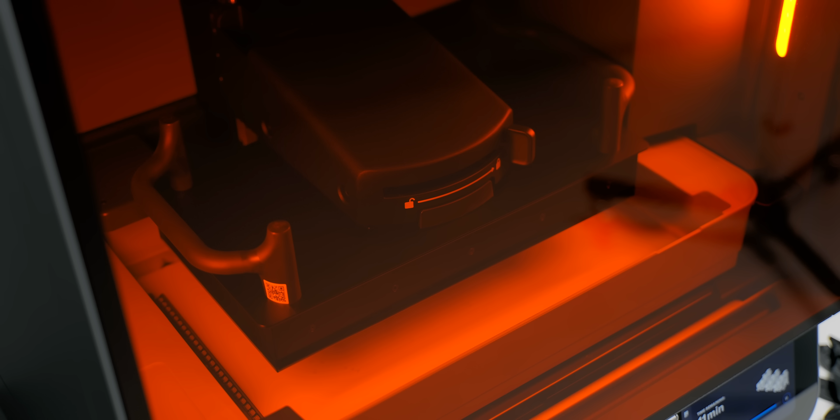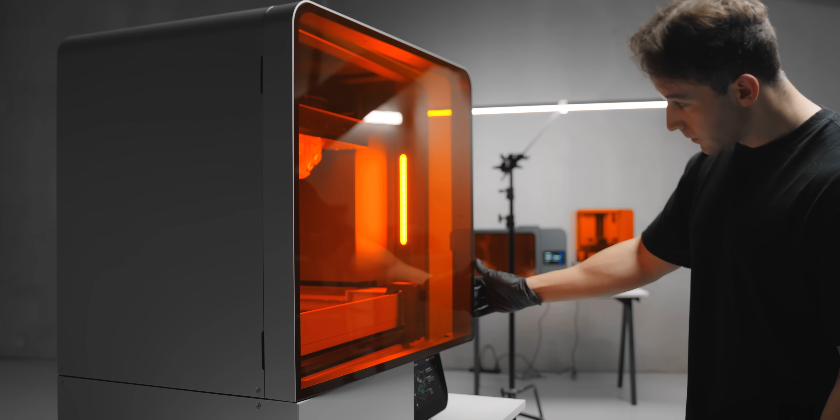You've probably seen filament 3D printing at this point. When someone mentions 3D printing, this is usually what they're talking about. You've got plastic filament like this, which is pushed through a really hot nozzle, and that's rapidly drawing your 3D model layer by layer.

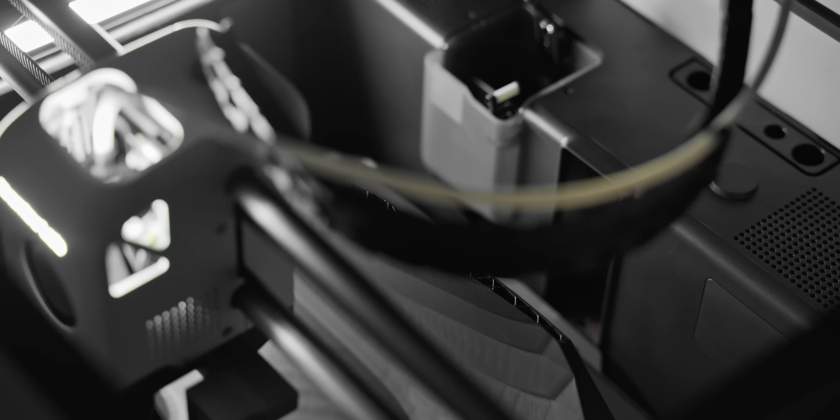These machines have become extremely affordable, and the filament as well is really, really cheap. The two I have here are Bambu Lab X1 Carbons, which I've been using for the past couple of years, and it's pretty much as good as filament 3D printing currently gets.

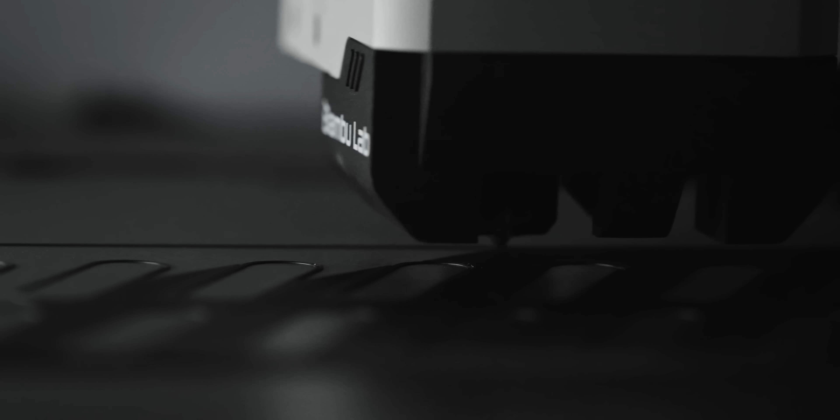They do have their limitations though. You can't really print really small, really detailed objects on filament 3D printers. You can only print as small as the nozzle that you're printing with. On most printers, that's 0.4 millimeters. These printers can go down to 0.2 millimeters just by swapping the nozzle out, but even that is not detailed enough for some objects.

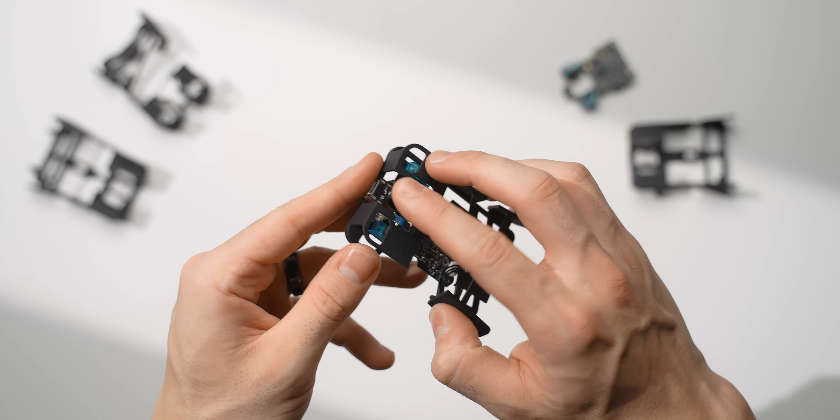Now that sounds really, really small, basically just a fraction of a millimeter, but if you want to print something like a scroll wheel for a mouse, for example, you need to go way, way lower.

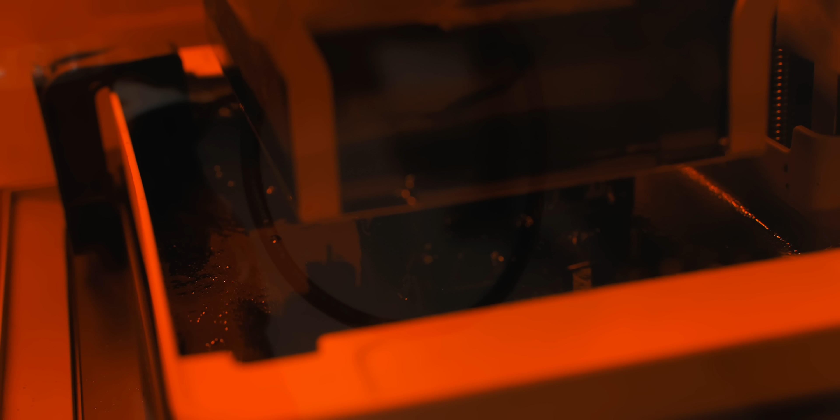And for that, there's resin 3D printers like this one, which take detail and resolution to a completely different level. This would be like if a filament printer had a 0.05 millimeter nozzle. That's the kind of detail that we're talking about.

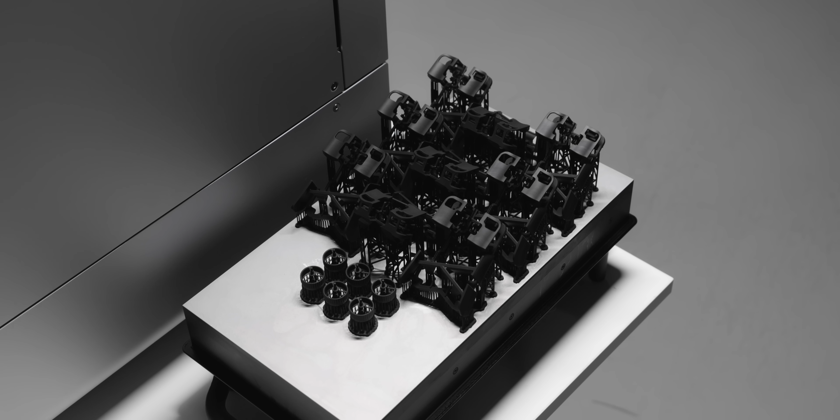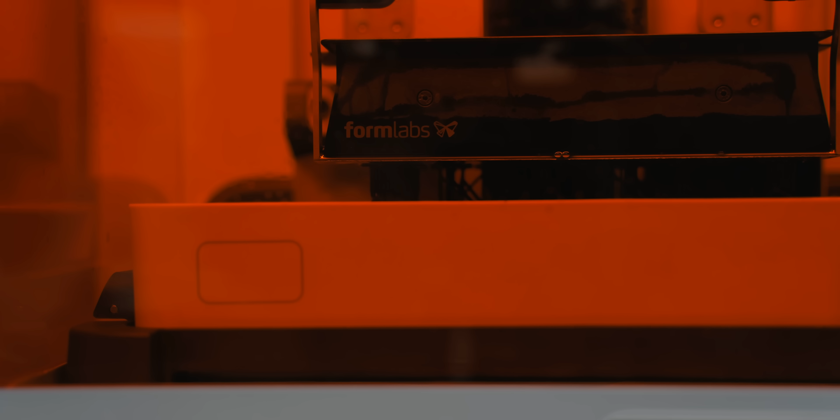Also, if you've never seen resin 3D printing in action, the first time I saw it, it completely blew my mind. In here is literally liquid resin, which is reacting with UV light to create the highest detailed 3D prints that are possible today.

I'm gonna go ahead and close this because you really shouldn't be breathing this stuff in, but yeah, resin 3D printing, especially on these machines here, it is pretty insane.

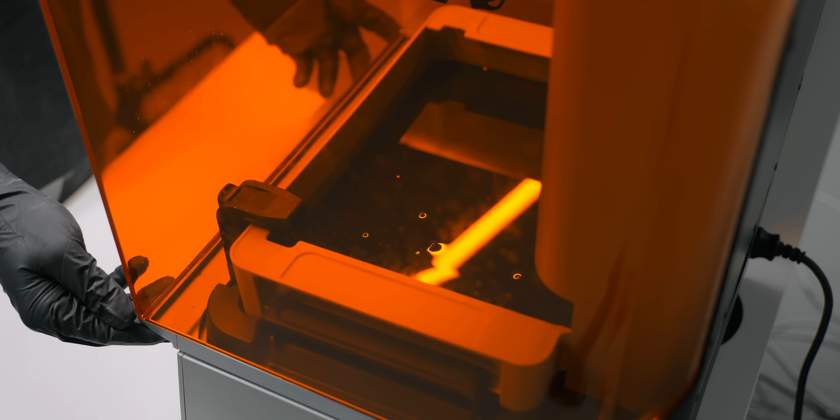If you've ever wondered what 3D printers companies like NASA or Microsoft use, it's actually these. This is a Formlabs Form 4. I picked this up about a month ago, mainly to prototype the Zero Mouse and just to kind of iterate on it at a higher speed.

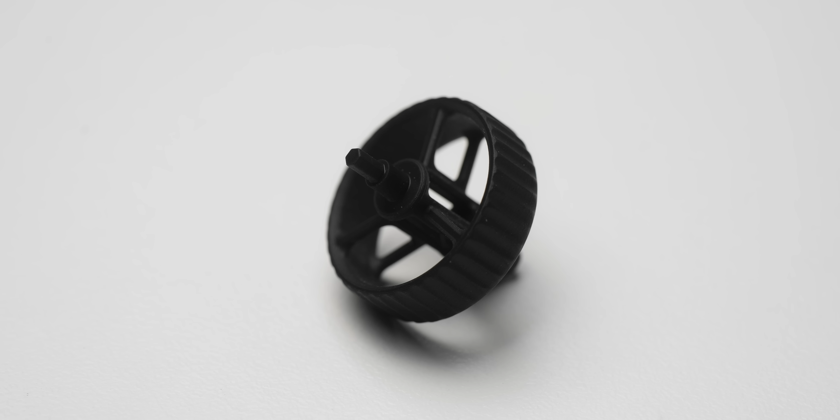But then I saw the quality of the prints that I was getting off this machine. I'm not kidding, they are production quality parts. But believe it or not, at that detail, they also print very fast.

While filament printers need to trace and fill in each individual layer, resin printers print the entire layer at once. They have a screen at the bottom which exposes the resin tank with UV light. Each layer is exposed uniformly one by one, and that ultraviolet light reacts with the resin to create the hardened resin plastic.

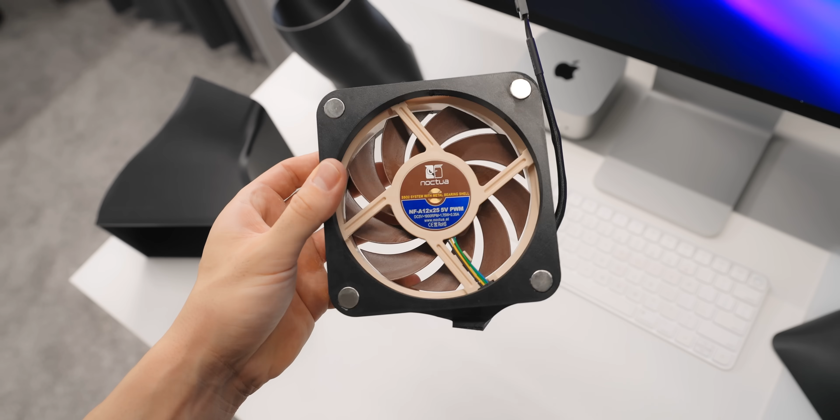This is where things get really crazy. A filament printer needs to draw each individual layer, so the printing time scales linearly with the amount of objects that you're printing. Printing an object 3 times will take 3 times as long compared to just printing it once.

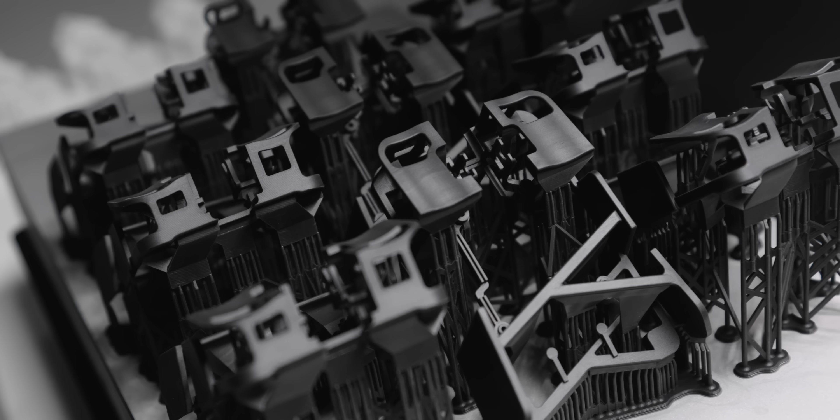Resin printers, though, take almost the same amount of time to print 1, 2, or however many objects you can fit on the build plate. And the build plate on my new 3D printer is absolutely massive. This is about as big as resin 3D printing gets before you start getting into like the enterprise $100,000 machines.

So yeah, after I saw how good the Form 4 was, I reached out to Formlabs and said, hey, I'm gonna start doing some production stuff on these machines soon. Do you maybe wanna send me the bigger version, the 4L? And yeah, here it is.

This is my new 3D printing workhorse, the Formlabs Form 4L. Absolute beast of a machine. I mean, I can almost climb inside here. The print volume is that big.

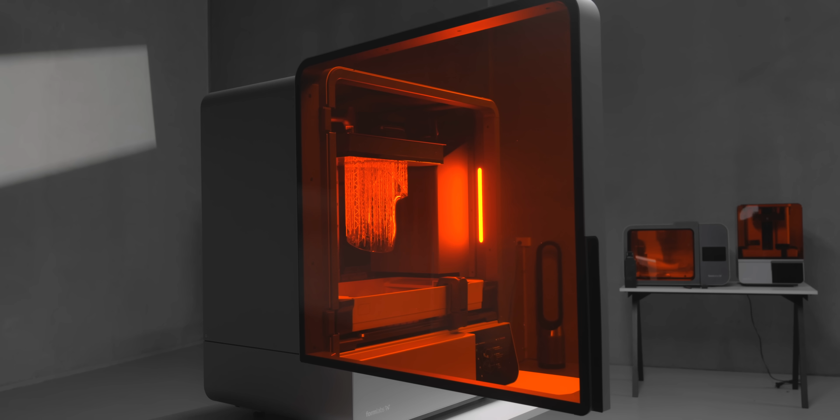But yeah, I think the best way to show you how insane this thing is, is to quickly get it set up and we'll do our first print.

Setting up the printer only takes about 2 minutes. You just insert the resin tank, insert the mixer, clip on the build platform, connect to the Wi-Fi, and insert whatever resin you want to print with.

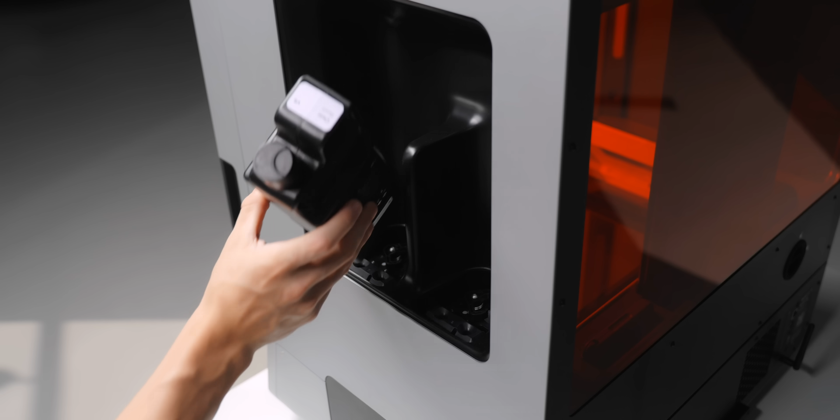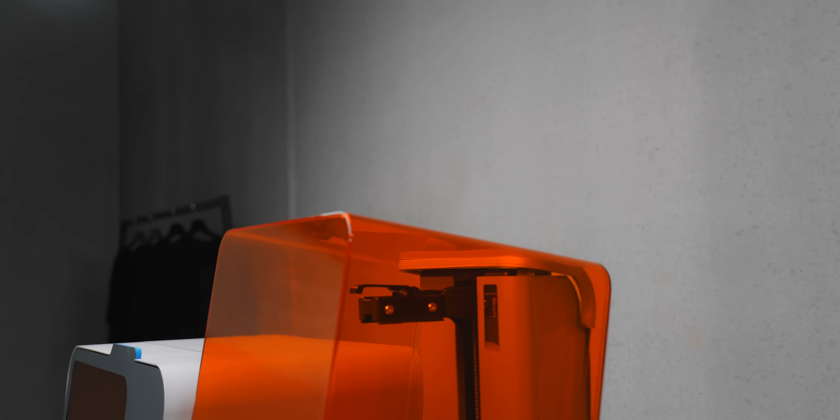The build platform comes leveled out of the box, and something you don't realize until you have these machines in hand is how well made they actually are. From product photos online, you can tell they're very premium machines, but every interaction you have with these printers is like a quick release latch or a soft closing hinge. Everything is so easy and refined.

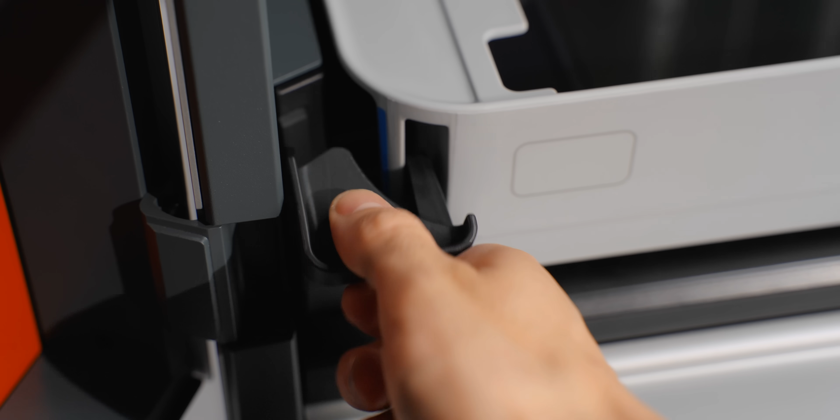When your tools are this nice to use, it not only removes the friction of making stuff, but for me at least, it makes it thoroughly enjoyable every time you fire them up.

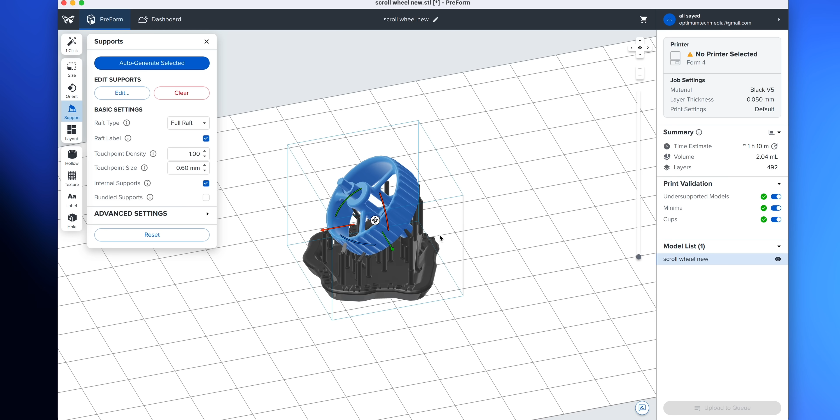Formlabs have their own slicer printing software called PreForm, and my experience with it so far has been actually pretty good. You just drag and drop in your 3D model, click Auto Orient, auto generate the supports, and after that you're ready to print. You can go in and edit the supports, clean it up a little more if you're producing a final production part, but for the most part the print automation is actually really good for most people.

This is what I really wanted to show you though: how fast the print speed is on that 4L. If I just wanted to print one scroll wheel, it takes about the same amount of time as my Bambu Lab X1 Carbon, so a little over an hour, which is actually pretty good considering the quality of the part is in a completely different league. I mean, this is almost injection molding.

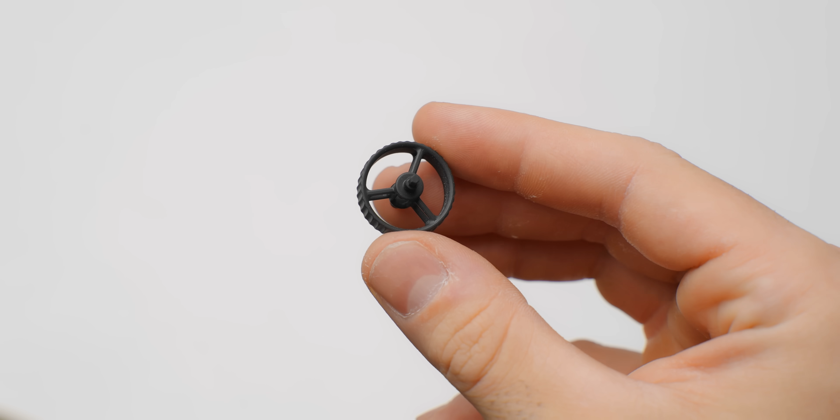If I wanted to print 100 of these though, we're looking at some very different print speeds. Over 3 days now on an X1 Carbon, and only 2.5 hours on a 4L. I could print over 1,000 of these in just a couple days on one machine.

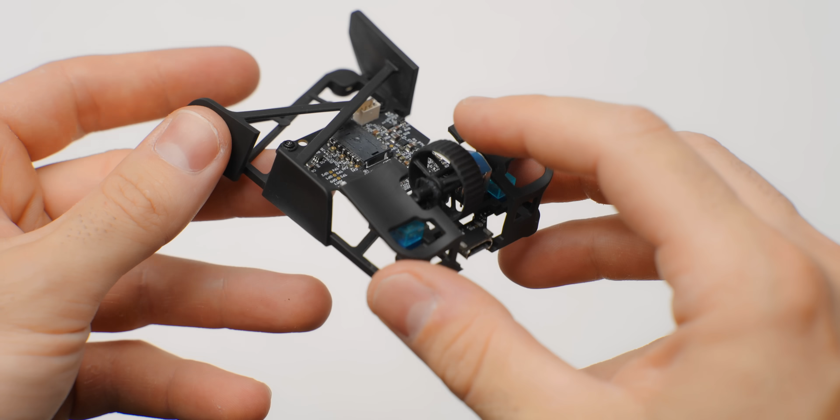So this is the resin that you use with the printer. It's pretty cool, it just drops in like a cartridge. The 4L has 2 loading slots because the tank and build volume is so huge. But these are pretty cool, they have bite valves on the end, so it automatically dispenses resin into the tank just as you need it. There's no pouring the resin in and getting all messy, which I absolutely love.

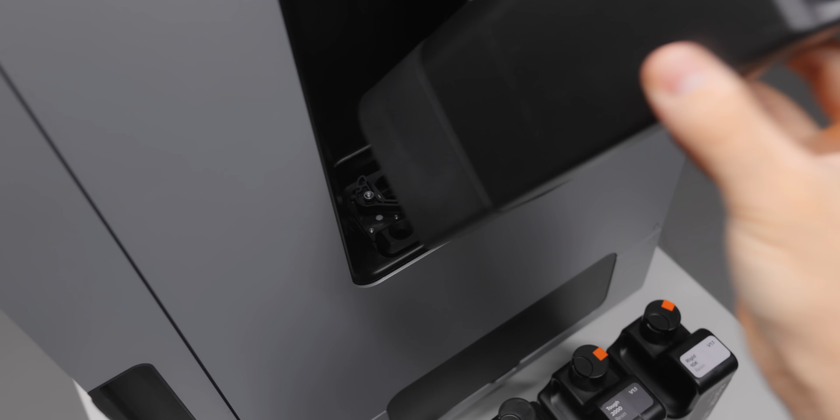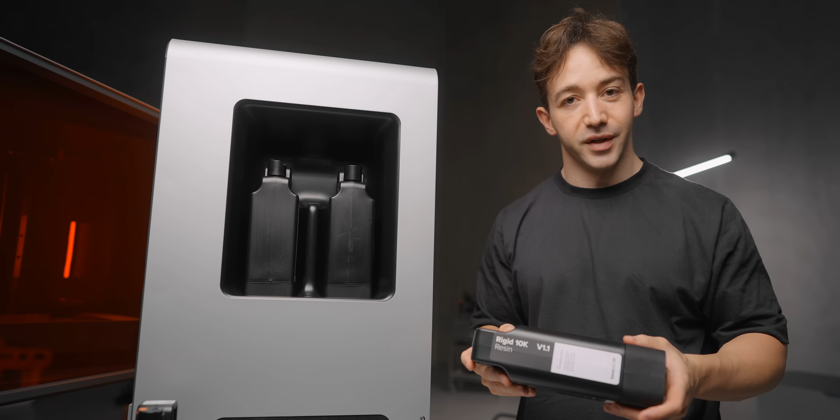I do also have to say Formlabs' choice of resins and materials is very, very insane. If you are doing proper, serious 3D printing, prototyping, or even production like myself, Formlabs do not play around. It's one of the reasons I bought the Form 4 over cheaper alternatives. Their material catalog is nuts. You've got glass-infused resins, ABS-like resins, elastics, silicones, biomed resins for dental stuff, or even for implants. It's pretty crazy what some of the stuff you can 3D print.

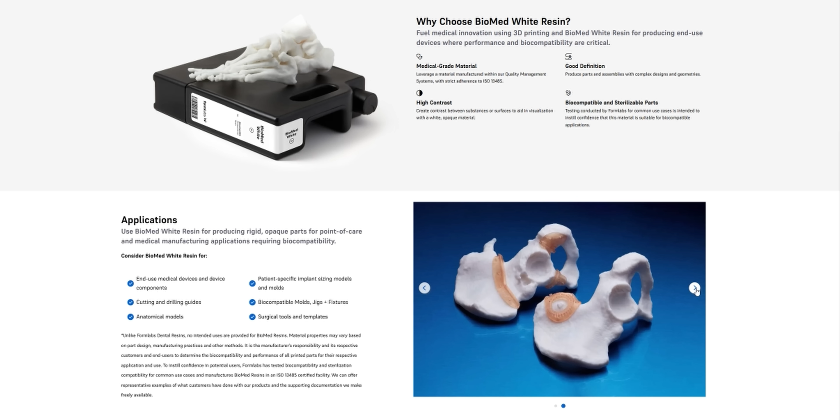There are definitely much cheaper resin 3D printers and resins on the market as well, but honestly, I'm at the point now where I care way more about the final result, the quality of the print, the quality of the machines as well, and the workflow efficiency, than I do saving some money on the machines and the resins.

And believe it or not, I did crunch some numbers for printing my own Zero Mouse. It is actually cheaper to print it on these Formlabs resin machines than to outsource them like I was doing before.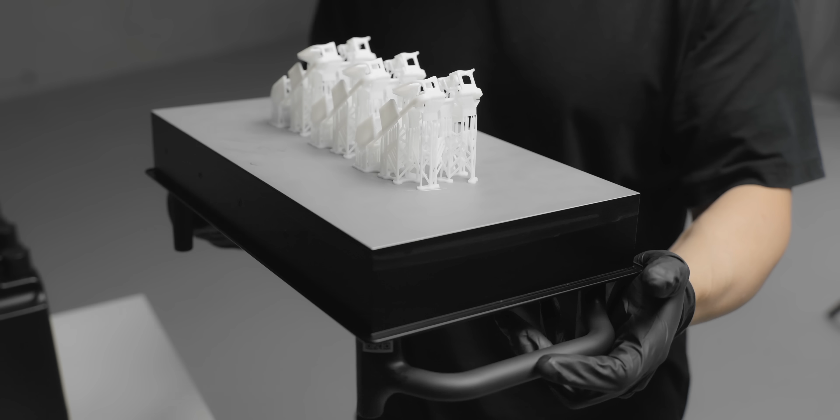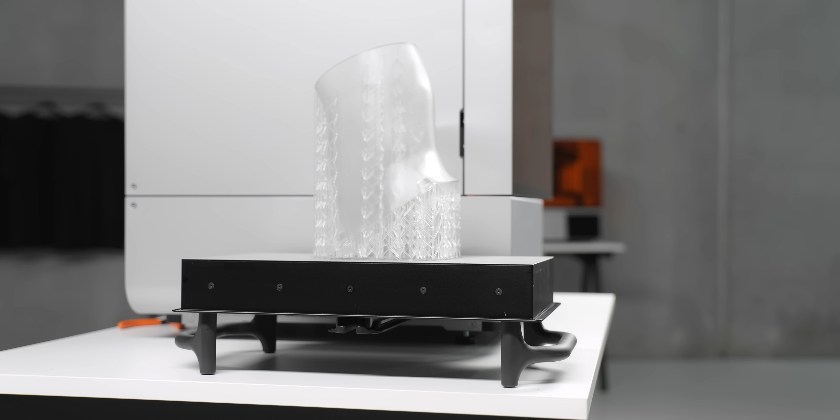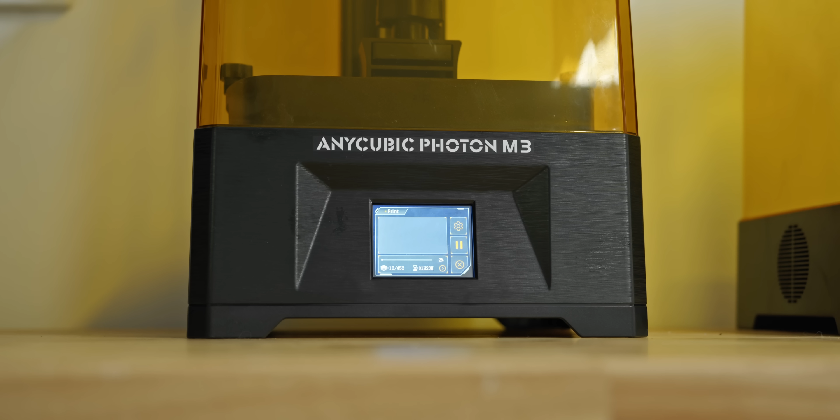There is one big downside to printing with resin though, which I haven't mentioned yet. Once your print is finished, you actually need to wash it with a solvent and then post-cure it with UV light. This is one of the main reasons why I've stayed away from resin 3D printing for so long, and why I actually had a cheap resin 3D printer a while ago, which I just haven't bothered using ever again. Resin printing is just messy and there's a lot of steps.

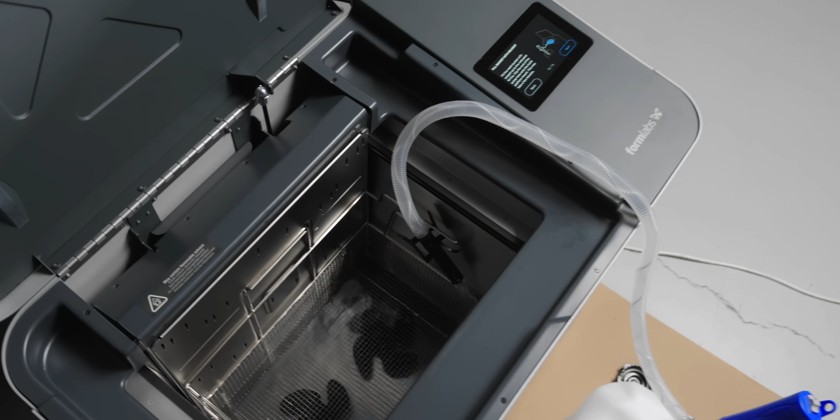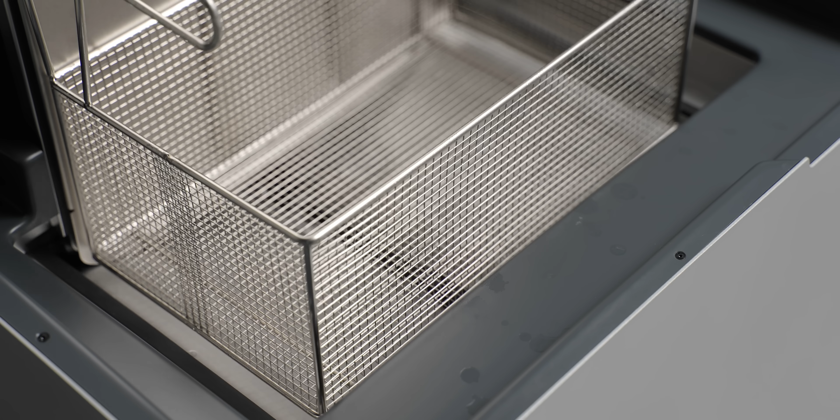Formlabs though is different. It's a premium price for a premium experience. The giant wash machine for the 4L, which takes almost 50 liters of IPA, looks intimidating, but could not be easier to use. There's no getting your hands dirty or cleanup involved whatsoever. You just place the build plate on the rails, press a button, and come back 15 minutes later. Occasionally, you need to swap out the solvent, but you can do that with the pump they provide.

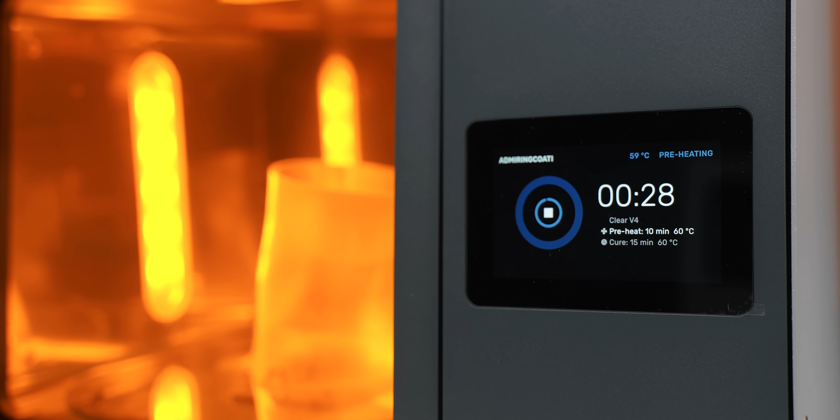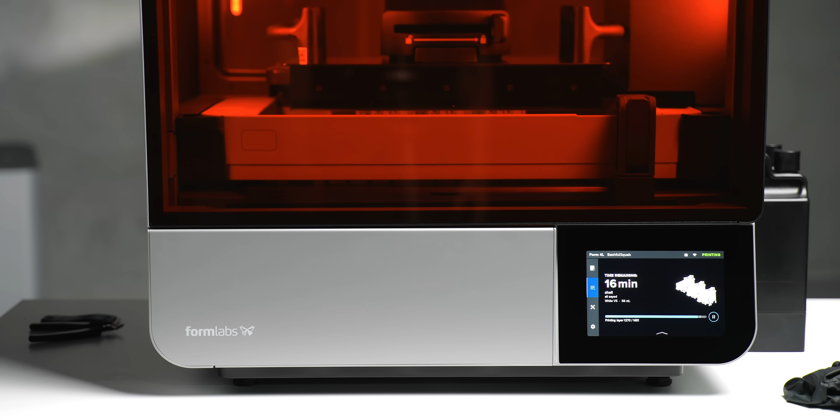And then there's the cure station, basically a giant microwave for UV light. This is to further cure the print, improve the mechanical properties and the surface quality. Here, all the profiles are built in, so temperatures and duration are impossible to mess up. I've yet to find any annoying things or pain points in this workflow. Every step of the user experience with these printers has been obsessed over down to the details.

By far the best thing that I've ever 3D printed though is the Zero Mouse. I wanted a mouse upgrade for my ranked esports games, and what I wanted didn't really exist.

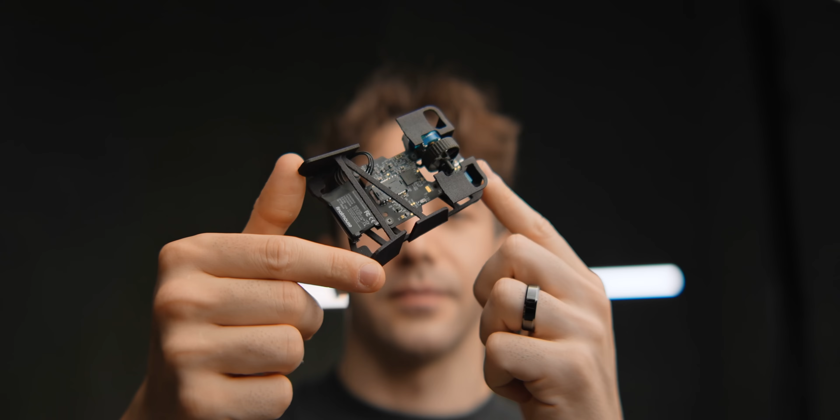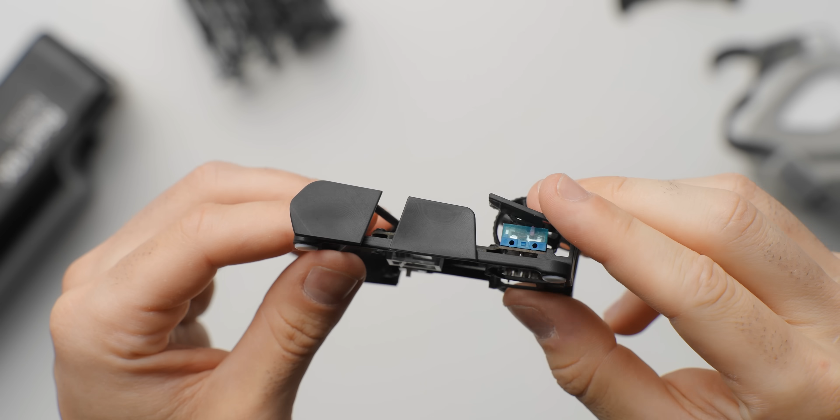So I decided to make something myself, and a bunch of iterations later, we've got the Zero Mouse Blade, and it's now 3D printed using Formlabs black resin, and I think it looks pretty incredible. I've been using this for a little bit now, and it is a massive upgrade from what I was using before. Previously, these shells were printed in nylon 12, which is a really nice material.

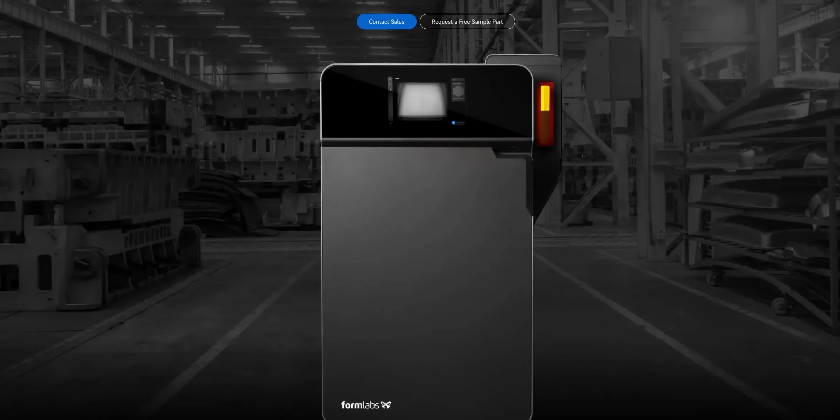It's low density, relatively strong, and really easy to print. Formlabs actually have another machine called the Fuse 1 Plus, which can print nylon 12. I was pretty interested in that as well, but the more I print and go down this path, the more I realize that resin is actually the best choice for what I'm doing, especially this resin here.

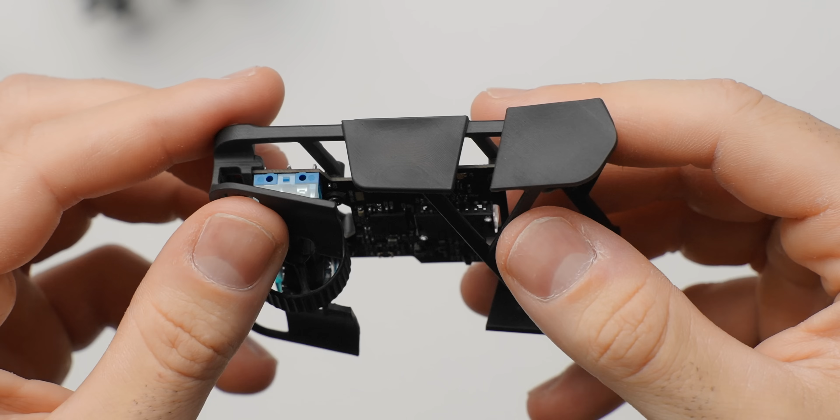This is Formlabs black resin. It is really close to the quality of injection molding. You can still see layer lines in some spots. There is a little bit more optimization I can do in terms of where I'm printing the supports to reduce those layer lines, and how I orientate the model. A couple of degrees here or there can really shift where the layer lines pop up.

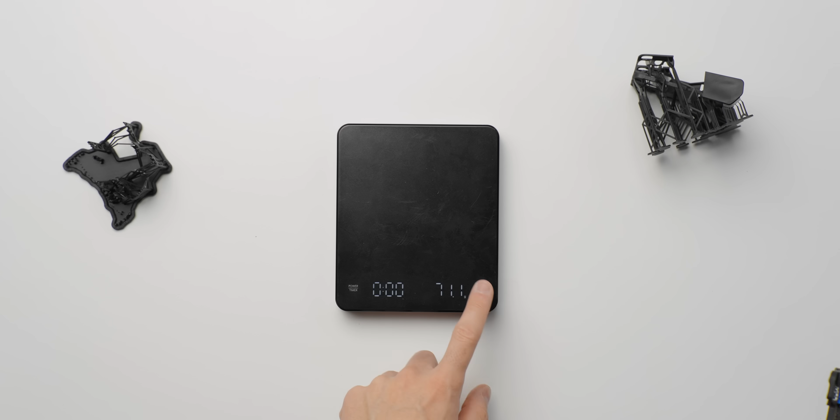So there's a little bit of optimization to do there, but yeah, this is printed at 50 microns. I can go down to 25 micron layer height, and that will resolve the layer lines even more.

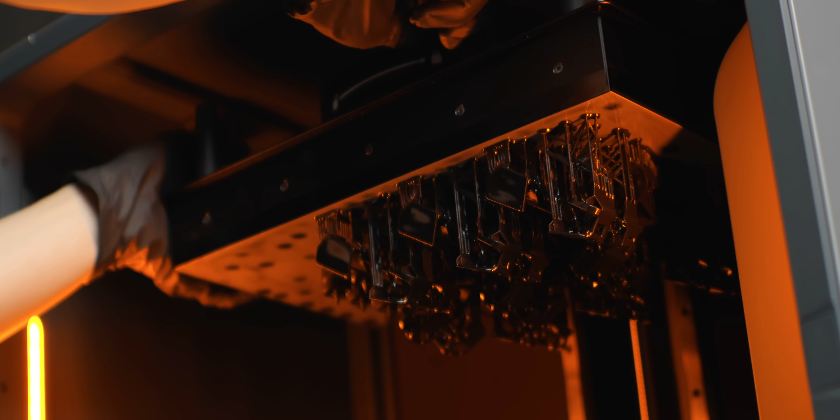In terms of how many I can print in one go, here I've got 9 shells plus 6 scroll wheels. I can actually fit up to 15 shells in one print on the 4L, which is pretty crazy. That's like a 3.5-hour print, which is pretty quick. Over one day, say 3 to 4 print cycles, that's like 45 to 60 shells.

I'm most likely going to be adding another machine to the workflow as well, so that's going to bump the print output to around 100 shells per day, and around 1,000 in 1 to 2 weeks. That's actually faster than it took for my outsourced nylon prints, which is pretty insane.

But yeah, there it is. Zero Mouse in Formlabs resin. Looks amazing, feels amazing, and I could not be happier. I'm just waiting for the circuit boards now, and these will be ready to ship.

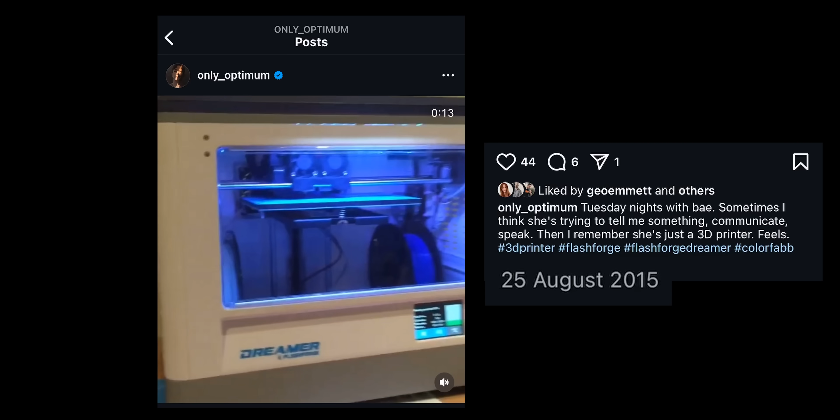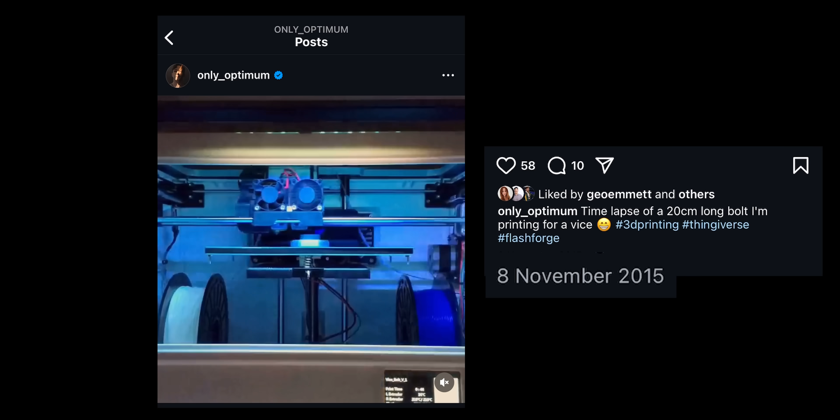Now, I started 3D printing almost 10 years ago. My first printer was a FlashForge Dreamer, which I spent all of my money on. I was obsessed with it. I had to manually level the bed for every print. I had my window open constantly because of the ABS fumes. The thermocouples had to be replaced on both of the extruders, and I had no idea how to 3D model.

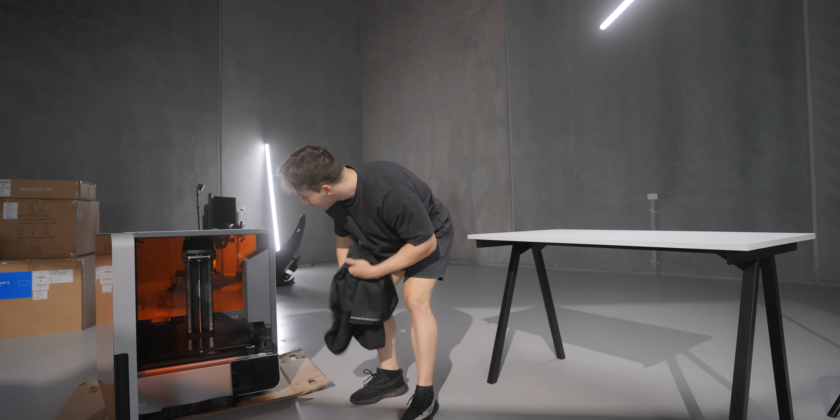A couple of years later though, I made a window mod for my first PC and posted my first video on a channel called Optimum Tech. If I hadn't bought that first printer, this channel probably wouldn't exist. But fast forward to now, I can't believe these are the printers that I now own and get to play with. It's not something I could have ever dreamed of.

In saying that though, I can't just go ahead and buy like 50 of these machines just yet. They are prosumer machines at a prosumer price. The Form 4 kit will cost you around $5,500 US, including the printer, the wash, and the cure. And the 4L kit, these are big printers, you need 2 people to lift them onto a table. It's $20,000 for the entire kit.

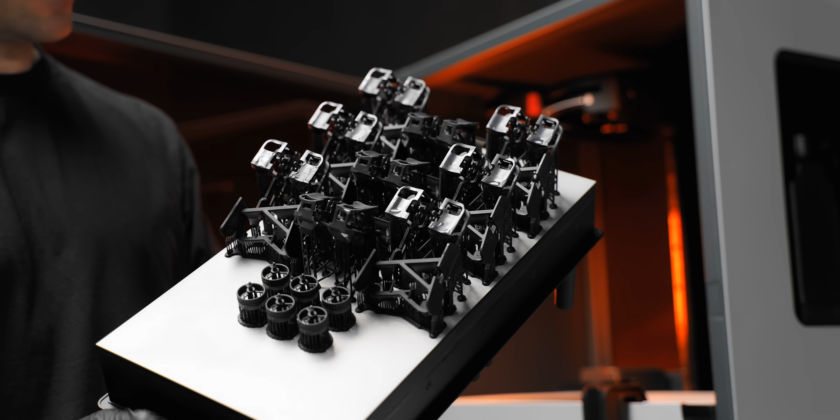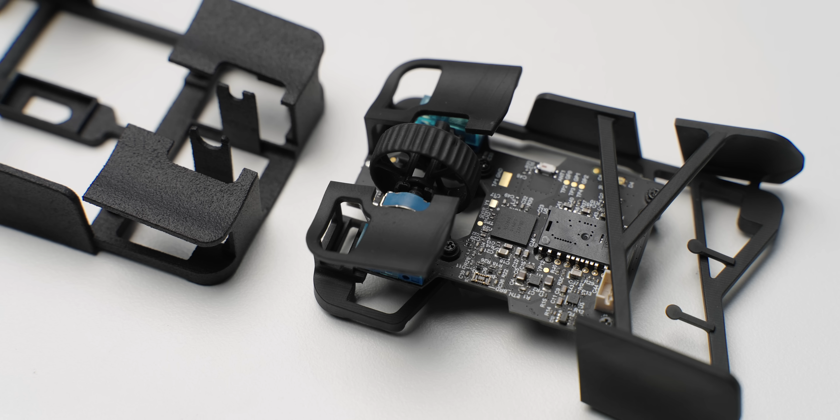Even if I had committed my Zero Mouse to injection molding, which is a different ballgame altogether, at the end of the day it would be a heavier and weaker product. I would still at least have one Form 4 for prototyping, because the amount of prototyping and iterating I've been doing lately on this machine, there's almost no price you can put on that kind of development speed. Being able to make changes in the morning and have a print done by midday is ridiculous. So yeah, expensive printers for a prosumer market, but that's kind of where I find myself falling today.

At the very least, you're going to see these printers in the backgrounds of my other videos. They're going to be used for other projects down the road as well. So now you know what these incredibly interesting looking devices are and what they can do, and also just how insane 3D printing is today.